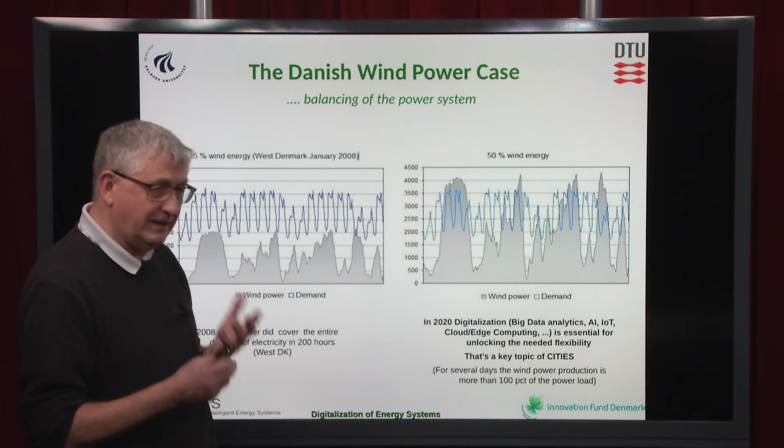But today, in 2020, when we have past 50% fluctuating renewables in our power system, and on top of that we also have solar power, we see a crucial need for digitalization of the energy system. So a crucial need for use of AI, Internet of Things, Internet of Services, big data, statistics, cloud computing, fog computing, edge computing, in order to unlock the flexibility which are needed for balancing the energy system of today.

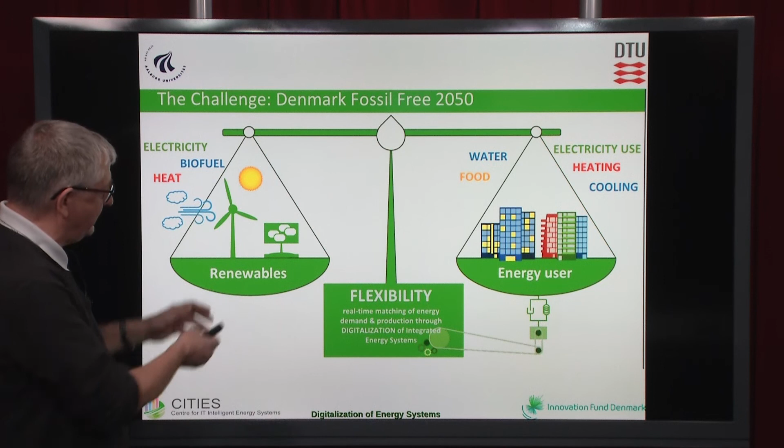Historically, we had a lot of fossil-based production units, and actually all the intelligence were installed on these large centrally placed power plants. So we operate the power plants so they could match the requirement for electricity load. This system is now going to be disrupted more and more, because in the future we will only have a weather-driven energy system, so we'll not have these centrally placed fossil-based power plants. They are gone.

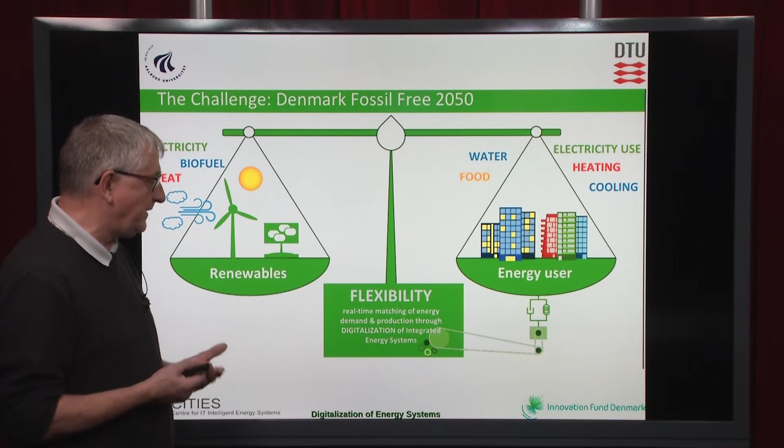And that implies that all the intelligence has to move from this production side to the end user side. So what we have done in the CITIES project is we have started solutions through digitalization and sector coupling for matching production and demand by moving the intelligence to the end user side.

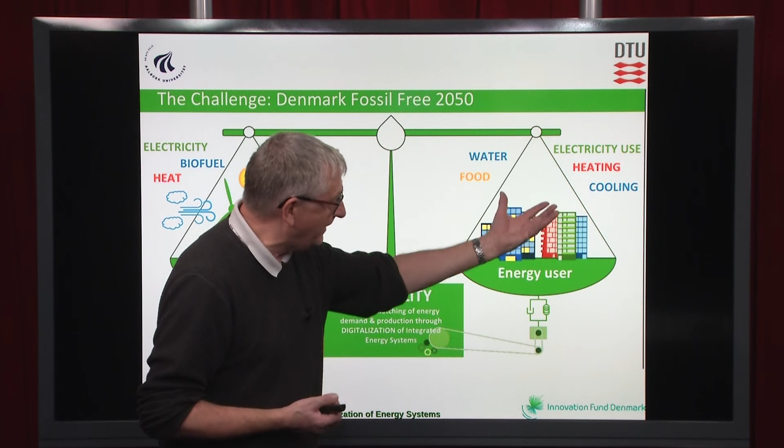In many cases, when we discuss the low-carbon future and the actual situation, people are still discussing mostly about grids, supergrids, grids connecting different countries, and batteries as solutions here. They tend to overlook the huge and good possibility by enabling flexibility, and enable this flexibility by the use of data-driven methods, use of machine learning, sector coupling, IoT, big data analytics, and so on.

Of course, in the future, we'll need more grids. We'll also need more batteries. But I believe that the optimal solution is somewhere here if we are aiming at an efficient integration of the low-carbon energy system.

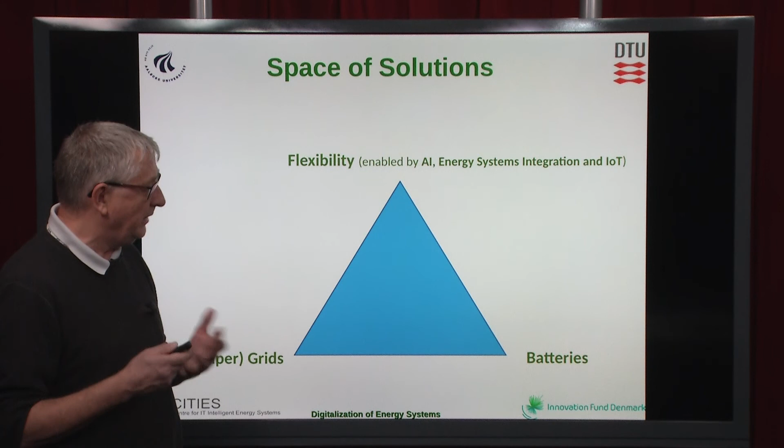So what we have aimed at is we have focused on the use of digitalization and other data-driven methods for integrating the different energy vectors, thermal system, power system, biomass, fuel, gas, using data and models, communication and optimization for the sector coupling. And by doing that, we have demonstrated, and we'll come back to that, we can enable a lot of flexibility which is needed for the efficient transition to a low-carbon future. And actually, with the tools we have developed, we can basically already now save a lot of CO2 emissions.

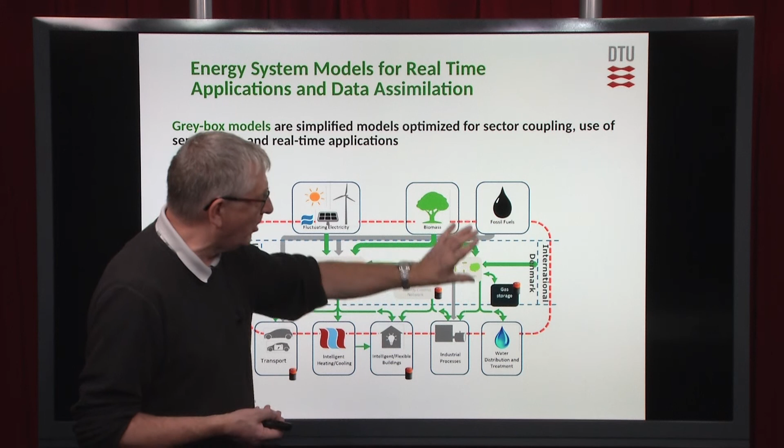One of the key elements of that is proper tools for modeling. We need models on all levels and models which are able to work in real time and assimilate data in real time. So what we have focused on is, for instance, to establish a modeling framework called grey-box modeling, which are simplified models optimized for sector coupling, because they are simplified models. And these models are able to assimilate real-time data and real-time values from sensor data and use that in real-time applications.

Why do we need these simplified models? Yeah, one example I can tell you about is for wastewater treatment. When we looked at the smart wastewater treatment in our first project, we got a model where they proposed to use 43 coupled nonlinear differential equations. And it took something like half an hour to calculate what will happen in 5 minutes from now.

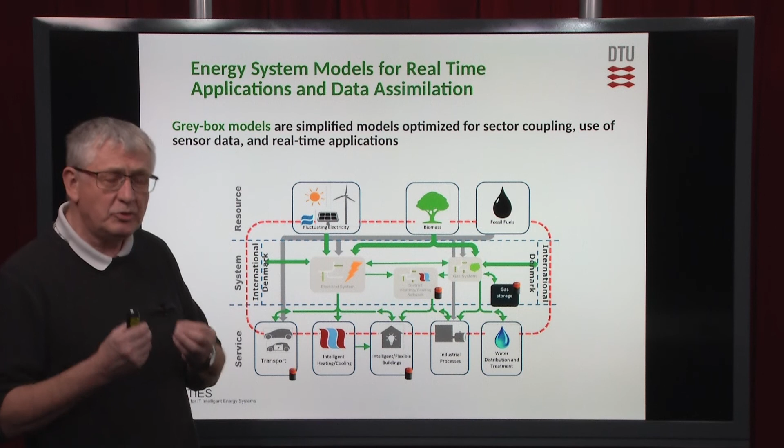So obviously, these models were not really suitable for real-time applications. So we need simplified models. And furthermore, and maybe even more importantly, today we have a lot of sensors at the wastewater treatment plant and in the sewer system. But in a model with 43 coupled nonlinear differential equations, we have a lot of parameters, and it's simply not possible to assimilate information from all these sensors into the model.

But by using gray box models, we have reduced this to 5 or 6 coupled stochastic differential equations, which still describe all the dynamics and the variability, but then with way fewer parameters, and the models can also run in real time and provide forecasts and be used for control.

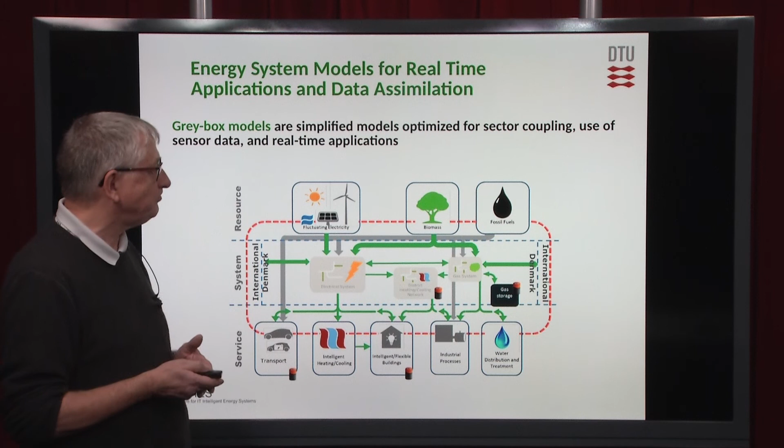What we have shown, for instance, is that by new data-driven methods for temperature optimization in district heating networks, we can save 800 million Danish kroner annually. And that corresponds, of course, to a lot of CO2 savings as well. And this is, of course, only the temperature optimization in the district heating network. We can also do a lot of optimization on the plant and in the buildings, and I'll come back to a part of it.

For heat pumps, we have studied new controllers, predictive controllers for the heat pumps, and we can show that we can save 10 to 30% by these new controllers based on new forecasts, basically now. And by integrating forecasts in a new version of smart house controllers, we can save 5 to 15% of the CO2 emissions.

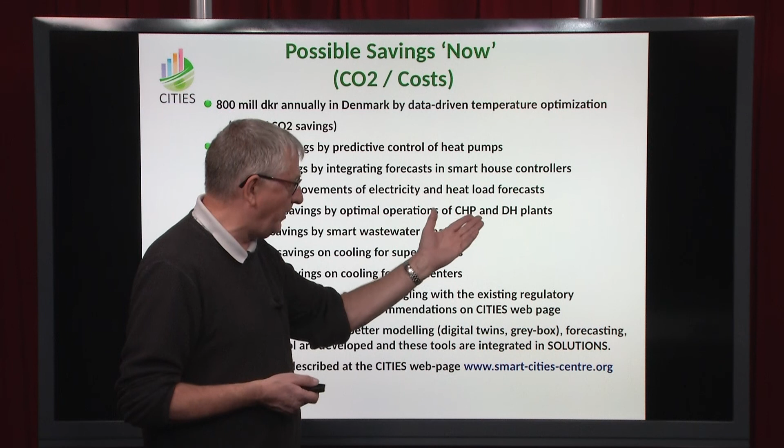And when we look at the heat load forecast and electricity load forecast, which are important for production planning and for many controllers, we have also shown that we can improve the accuracy of the power load and heat load forecasts by 10 to 40%. And for the operations on the combined heat and power plants and the district heating plants, we could easily save up to 10% by new digital solutions.

If we look at the wastewater treatment plant, then we have documented that we can save between 5 to 30% by digital operation of wastewater treatment plants. A wastewater treatment plant is flexible both on the plant with the oxygen which is put into the water as a part of the process, but wastewater treatment in general is also flexible through the sewer system, where you can use the pumps in a way where you hold back water and only pump the water when you have mostly green electricity.

We have seen that we can save 10 to 20% for supermarket cooling by smart controllers and forecasting. And for data centers, we have shown that by producing the cooling at night and using smart controllers and forecasts, we can save up to 90% of the CO2 emissions related to the cooling of data centers. So this shows that there is a lot of potential for CO2 reductions basically now.

But in many countries, including Denmark, we are still struggling with the regulatory framework. One of the issues we have, for instance, is that the energy taxes are constant. So that means there are no incentives to behave in a smart way, and there are no incentives to use more electricity when it's green compared to when it's black. So it doesn't really happen.

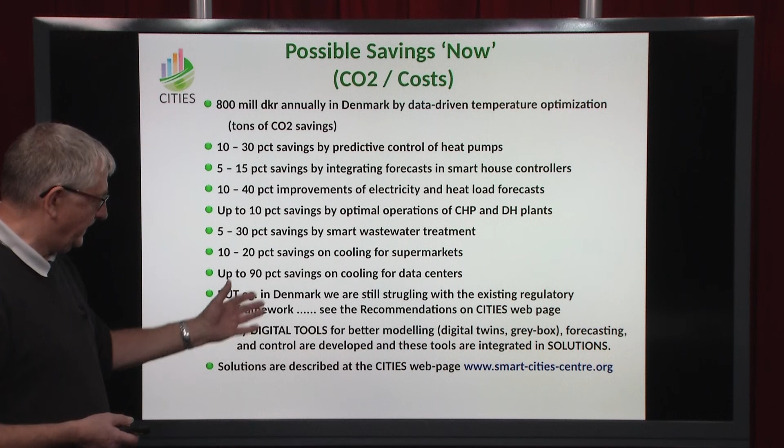But we have a lot of digital tools on the shelves which are ready to use basically now. These tools are based on better methods for models using digital twin gray box models, better tools for forecasting, coherent forecasts on all different scales, and new controllers. And this can be found on the CITIES webpage in the section called Solutions. And here is shown a link to the webpage where you can find these solutions.